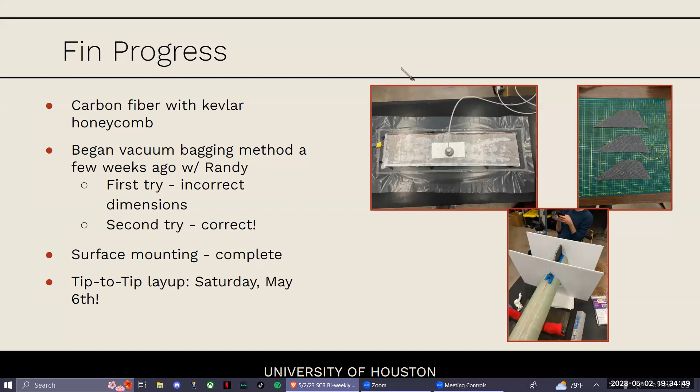All right, third interim project review. I know a lot of you here pretty much have a good idea of what's going on. So the third interim project review got split up into two different parts. We have the Hero X form submission, which we got completed last Friday, I believe.

And then the second part is a video teleconference, where essentially we're going to talk to the spaceport judges for like 2 hours. They're going to critique our rocket, ask us questions, do a full in-depth analysis about it. We'll have our little phone camera and we'll be walking around showing everything that we've gotten done so far. They'll be deciding if they think we're prepared, if we're ready for the next 2 months to safely launch our Shasta 6. If not, if they decide we're not ready, they can choose to drop us from competition. And that's not fun. We do not want that to happen.

So we will get as much as we possibly can done before then. If you guys remember, the video or flight readiness review, that's what they're calling it, is going to be happening May 15th, I think at noon is what we decided on. If you can't make it, let us know. We want as many of you guys there as possible.

All right, pre-flight checklist. In addition to this May 15th deadline, we obviously have our technical report due on May 12th. These pre-flight checklists are going to be a big part of that tech report, and we're going to be working on them this week in the lab.

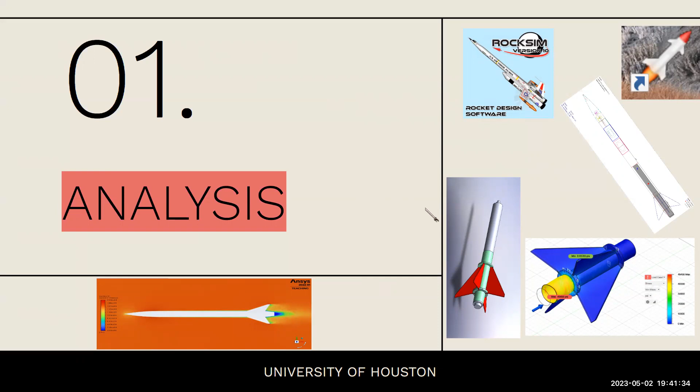Hi guys, we're just going to go over a quick overview of the latest Open Rocket file. One of the biggest changes to the design is that the fins have been moved up an inch—you can see it in the top right corner there. The latest apogee is currently 37,800 feet.

However, this is on Open Rocket, so we're still going to use RockSim Pro to get the most accurate read. The current flight time is estimated to be around 7 minutes, and the lateral distance is only 1.2 miles, which is pretty good news for the team that's going to be going out to recover it.

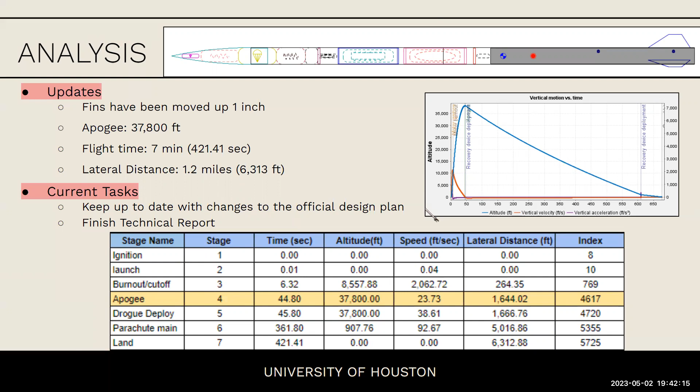The current task we're working on is keeping up to date with any changes to the official design, and finishing up the technical report you guys were just talking about. That's it for analysis. Thank you.

All right, next up, avionics, the sub-team with Riz. So that's what everyone's thinking.

Okay, so for our completed tasks—the camera's over here, sorry, it's confusing, I know. Just so everyone knows, the camera's on this laptop, and the buttons to control the presentation are on this side. Shout out to Kurt for getting us another SRAD antenna—now we can actually test our ground station and the code for it.

We also got a new PC, more computers for us to actually use the ground station. At the moment, all we have to do is manufacture the SRAD PCB and jam those into the avionics bay, in time for ground testing by May 15th. Also the coding to extract the data in a usable way—I know that was a problem with last year's avionics, but this year it should be completely good to go.

I'll be doing that. Right now it's just getting our avionics bay done at this point and getting our PCBs manufactured—shout out to Orlando for that as well, he's been up all night doing that. That should be good for everyone.

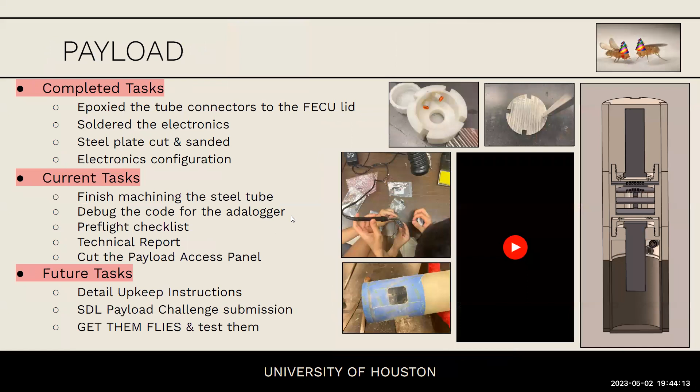For completed tasks, Brandon and I epoxied the tube connectors to the FECU lid and put some fillets in there, so they're really not going anywhere. Raj helped solder the electronics. Those pictures are on the right there. Teamwork makes the dream work.

The steel plate was cut by Ozzy, so it came in, and then Brandon taught me how to use the belt sander, so I sanded that down, and then we raked that out so that you don't get any cuts when you handle it. The electronics configuration is pretty good.

Sadly, no duct tape, but we'll be good. Kevin can figure it out.

We need to finish machining the steel tube on the right there. We'll play the video soon, but Frankie sawed the tube by hand, and then I do have videos of him with the angle grinder that we did not put on there, but he worked very well. He worked very hard. Just let Frankie do his thing when it comes to that stuff.

We got to debug the code for the adalogger. ChatGPT, shout out to you.

Thank you. And then we'll work on pre-flight checklists, of course, add those to the technical report, finish up those sections. I'm going to cut the payload access panel in the coupler and the airframe, and then we have to cut the negatives for that.

That one of the rough cuts is down there in the pictures. It should turn out okay. It would be very unfortunate if I ruined the airframe.

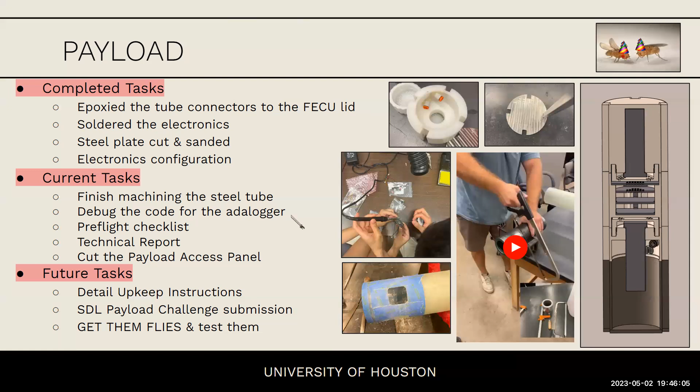All right, next up, propulsion. We got Scott. Hello, this was a big week for us because we finally made rocket fuel, which was amazing because we've been thinking about doing it for like a whole year now.

So we did this. On minor details, we made the motor bigger. We made it 54 millimeters from something like, what was it, like 29 or 35, somewhere in that region.

We made it bigger, but we went over to one of our team members, Wes's apartment, and made it on his back porch, like a little balcony, because UH won't let us do it here, and we found confirmation on that.

So in the future, we're still working. Also, you see the casing, or the little molds that we put the fuel in, and the fuel is potassium nitrate sugar. It's not the stuff we plan to use in the end, but it's just something to work with right now and get practice with.

The little grain castings were put inside something that Ozzy printed with a resin 3D printer. So shout out to Ozzy for helping us with that.

We're still working on sourcing the ammonium perchlorate composite propellant materials and all that stuff. Still work in progress, but we're doing the sugar at the current moment. And we will start working on the equipment we're going to use to test the ammonium perchlorate fuel.

We're just going to test that with the potassium nitrate, so we can keep on working and developing the tools we need without actually having the materials quite yet. In the future, ammonium perchlorate stuff needs to be done, and then we're going to be testing all this fuel out.

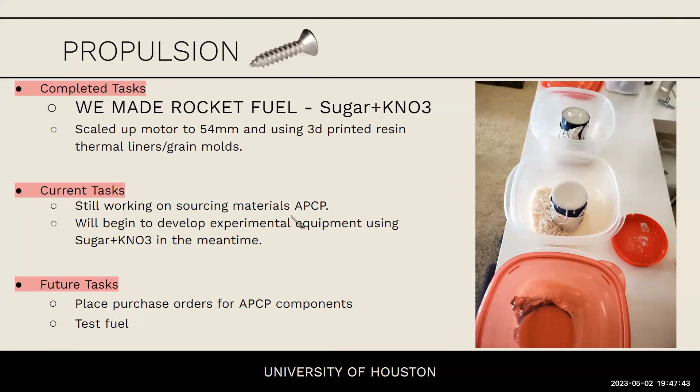And it was a lot of fun. We were cooking. The whole time we're like, this looks so good. I'm going to eat it. Yeah, it did look really good. It was like icing or something mixing it up. But yeah, don't tell me that.

That's all. Thank you. Thank you, propulsion.

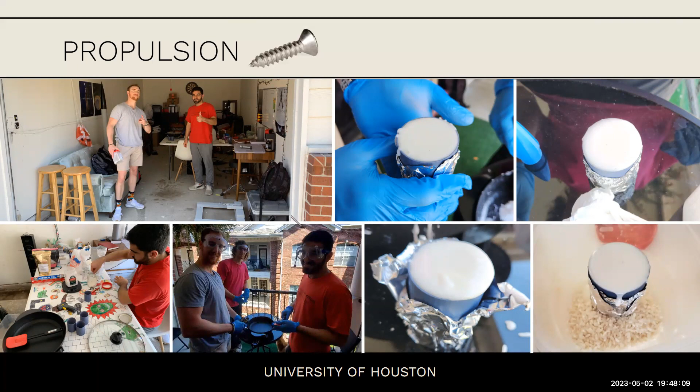All right, next up, recovery. Titus on fire. Christian, maybe. Hello. Good evening, guys. So Titus is not yet on fire. The man has been going a little crazy with the Tender Descenders this week.

Next slide, please. All right, so for as far as completed tasks go, last week, I believe it's last week at least, time's a little crazy at the moment.

We did the rubber band or shock cord tests. It's kind of ongoing. We're gonna keep messing around with the flakes and how many we do in the coming weeks. But our man Gustavo, the god, the myth, the man, the legend, he came by the lab late at night last week.

He told us how to use the load cell. It's an absolute godsend. I'm sure we're going to be using it a whole lot in the coming years to do a lot of our tests.

But just as a start to put it to some good use, we hooked it up to the shock cords there. Had Cheng Yu hold onto it on one end, Titus hold onto it on another, went running. Shock cord pulled apart, broke all the different flakes used on that cord. I think we recorded around 3 pounds of force to break 3 bundles of flaking with 3 rubber band windings per flake. So that was pretty cool.

Good data to know. We also did some mock assembly runs in the past.

We're going to do more in the future, I'm sure, moving up towards spaceport. Currently, we're doing a lot of craziness with Tender Descenders and just trying to make that configuration work and make sure we recover all the components used with them.

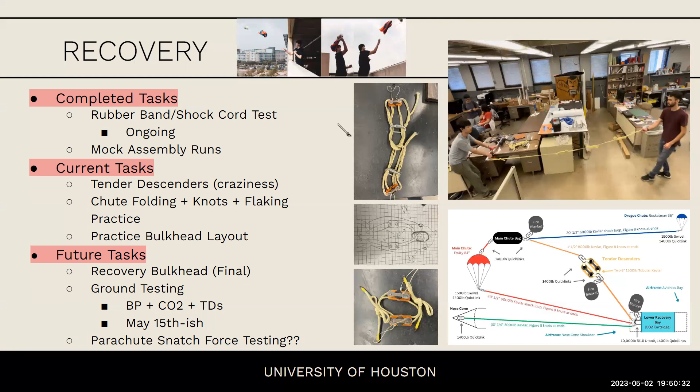And lastly, we've got structures. You got one?

So unfortunately, Brandon's back windshield wasn't broken into, but there was an attempted break-in. So he's getting that replaced and fixed right now. Send your thoughts and prayers, and I'm sure he'd appreciate some money if anyone needs to help. Maybe he can send some pictures later on, but he just duct taped it over right now.

For structures, it's been a whole lot of late night labs, been in there too much, but it needs to get done. So big shout out to Brandon and the amount of work he's been putting in. I know he's made some sacrifices in some of his classes, which he needs to get a move on with.

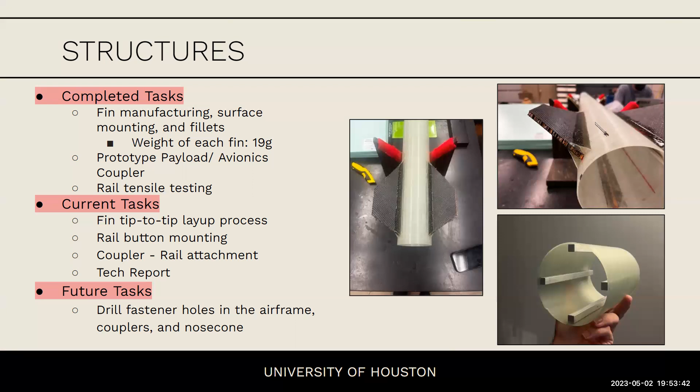But really wanted to say thank you to everyone. I know the past month of April has been insane in terms of classes and the amount of work we've had to put in on this rocket. I really, really appreciate each and every one of you. I really mean it when I say you guys are some of the best people I've ever worked with, and I really want you guys to know that what we're doing is something special. It's something I think you will always be able to talk about.

If you missed the last AIAA general meeting, there were alumni who are 4 to 6 years into their career, and in every interview they still talk about what they did on the rocket team. So know that it's all worth it in the end. Keep your classes a priority, but obviously we'll appreciate any help you can put in on the side. Your finals are coming up, but any questions about anything?